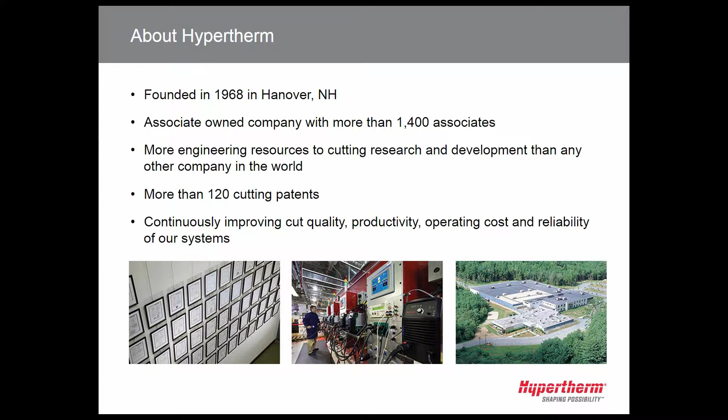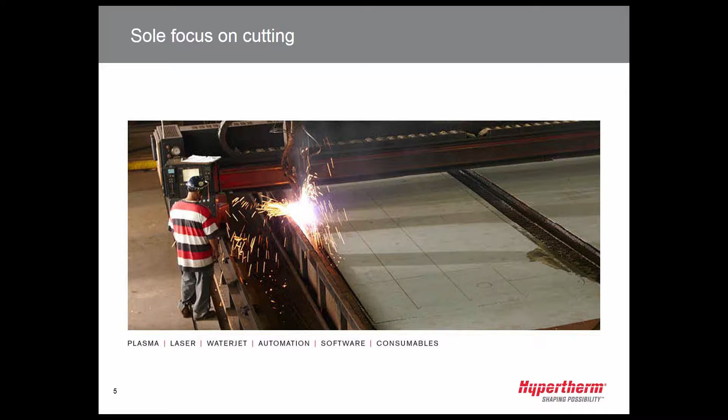Our products: we have plasma, laser, and water jet products, in addition to Hypertherm automation, so that would be CNCs and torch height controls, software, the subject of today's webinar, CAD/CAM nesting software, and also robotic software, and consumables for both Hypertherm and non-Hypertherm systems.

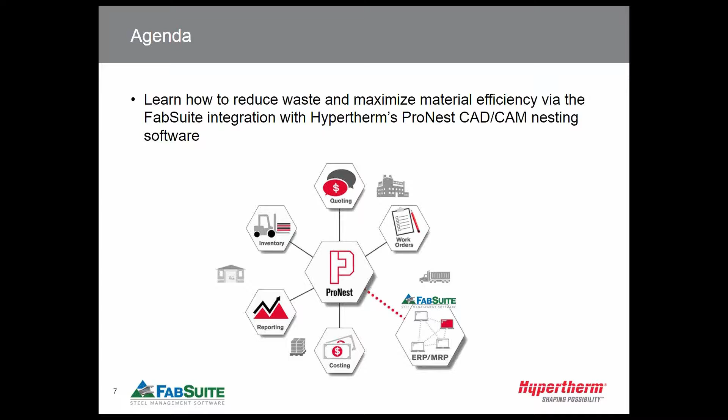ProNest is advanced CAD/CAM nesting software used by those who want to cut parts with laser, water jet, plasma, oxy-fuel, and combination punch process. It provides a CAD import through NC file output ready for cutting, where much of the process is managed automatically without manual intervention, as you'll see.

ProNest is designed with a modular architecture, with a main core module and optional modules that can be added to deliver the specific features that are right for the user's business scenario.

ProNest is recognized for boosting productivity, increased efficiency, enabling faster programming, ease of use, offering a single software solution for multi-process, all of which enable users to accomplish more. Lower costs through material savings and operating cost savings, and also improved part quality. Better finished part quality reduces the need for a secondary process.

What sets ProNest apart? It's the Hypertherm difference. ProNest is brought to you by Hypertherm industrial cutting experts with nearly 50 years of plasma, laser, and water jet experience to their name, and more than 120 technology-related patents. 100% employee-owned, Hypertherm's core values include honesty, integrity in the business, and excellence in technology innovation. As a result, across the globe, Hypertherm products are known for quality, consistency, and reliability.

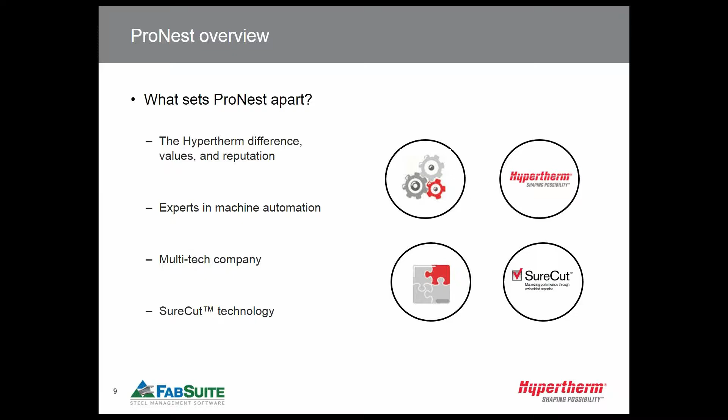So this is a brief overview of FabSuite.

It maximizes material efficiencies and reduces waste by efficiently managing our inventory and supplies. FabSuite ensures that you only purchase the material that you need when you need it, nesting to remnants, in particular optimizing bars and sheets that can help significantly reduce waste.

It improves productivity and reduces cost. FabSuite's production and purchasing tools can help reduce the time spent on high cost tasks such as material handling and cutting, because you are only cutting a bar or a sheet once and not multiple times.

Reducing errors and saving time. FabSuite imports data directly from authoring tools to eradicate manual data entry and the inherent risks of human error. This data is then used to drive the creation of quotes, purchase orders, invoicing, and shipping notes.

Full traceability. Another primary focus of FabSuite is material traceability. By recording key information such as heat lot numbers, mills, country of origin, and storing associated mill certificates, FabSuite delivers full material traceability for your product.

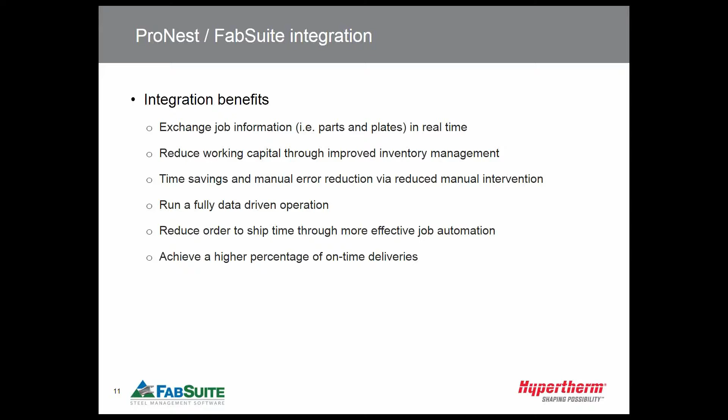Reduce order to ship time through more effective job automation. Saving time by entering job information can be translated into completing jobs more quickly, meaning that you can ship parts to the next process, to the customer, or to the job site faster, achieving better on-time deliveries.

How this integration operates: the bill of material data is exchanged from FabSuite to ProNest, containing the part, plate, and quantity details.

ProNest loads the BOM to its part and plate list, automatically assigning SureCut process parameters, including true hole, rapid part, and true bevel, lead-ins and lead-outs, then proceeds to automatically nest the job and output the CNC file for cutting and reports for operators and managers.

ProNest creates a report file containing the details of what was nested, plates consumed, and plate remnants, and returns it back to FabSuite for updating.

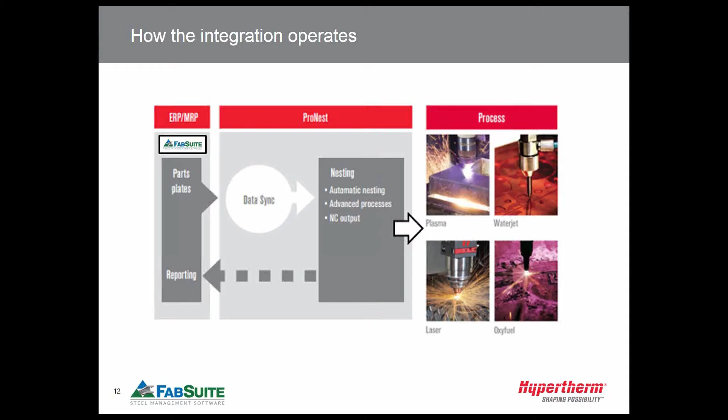All right, thanks, Steve.

All right, so Amy, you should be able to show your screen now. There you go. Okay, that's showing properly now? Yes, looks great. Okay, terrific.

So as you know, I'm Amy Davis. I'm the developer that wrote a good portion of this integration, and I'm just excited to show it off to you. So we're going to start by bringing a job into FabSuite.

We import a bill of material from just about any modern CAD package in existence. Most will export a KISS file, so we're going to bring in a KISS file.

FabSuite will automatically populate the job name and some of the fields. There's a lot of fields you can change on input. I'm going to just leave the defaults.

It asks a few questions as it comes in. This is an unrecognized material in this job.

It also has the opportunity to import drawings and CNC files. My CNC files for my plates are in DXF, so I'm going to bring in those DXF files that will give the CNC information for this job that I'm importing.

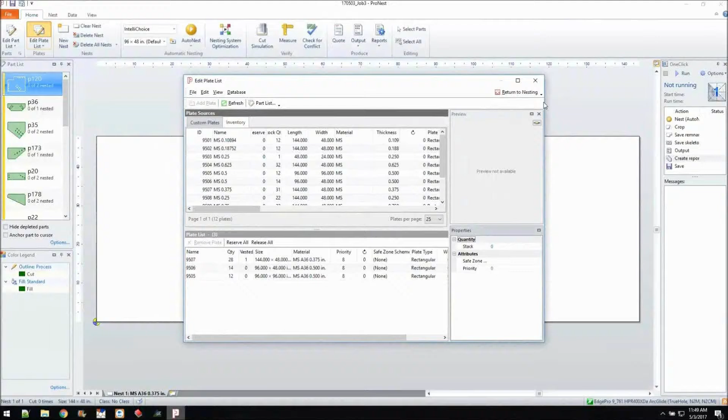So we'll highlight the plate, and I can go up to my 3/8 inch plate. I've got 3 of them reserved to a different job, so those aren't available, and I've got 28 that are available for this job. That matches. For the half-inch by 48, I've got 1, 2, 3, 4, 5, and 9 is 14, which is the half by 48, and 12 half by 96. So that does match what looks like should be available in FabSuite.

I'm going to nest just running one click. I think it looks cool, so we're going to watch it run with one click. Again, my plate list has these 3 sizes of plates that we just saw, and we can watch it nest.

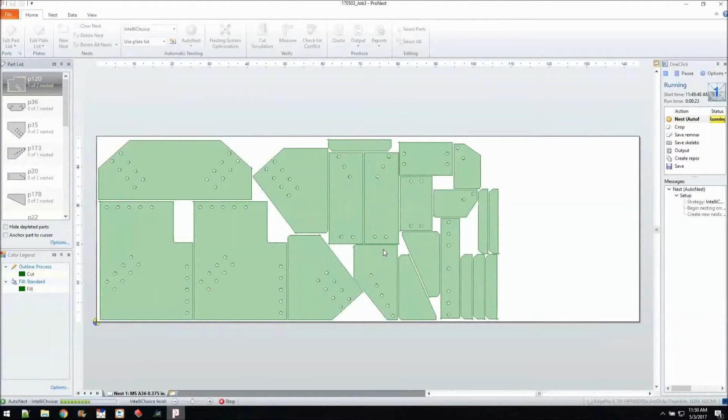One click is a way of running automatically through ProNest, where it automatically takes all the parts and part lists and does all of the processes you need to do beyond nesting, producing crops, saving out the remnants, producing reports.

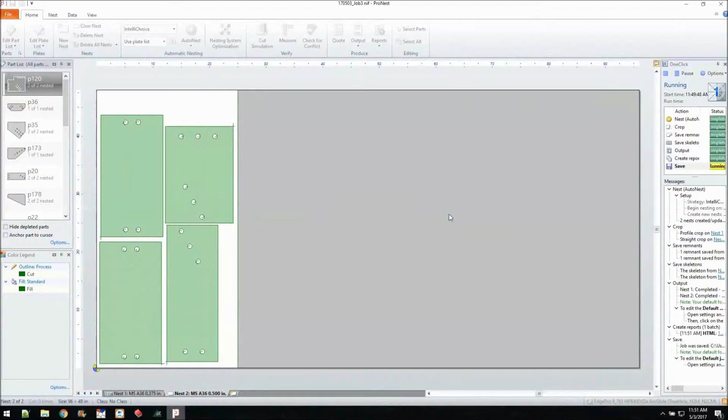Yep, and I have it. It just saved my remnants. I even had it save my skeletons. And it's sending that out to CNC now. Then FabSuite has a custom report that we create to come back to FabSuite. So we've got a rectangular remnant and a not rectangular remnant that were generated by these 2 nests.

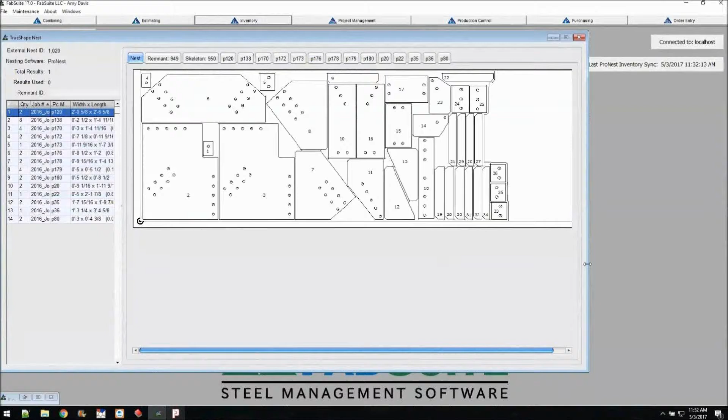We're going to bring them back to FabSuite. In that same combining run, we just import nested parts from HTML. This is the custom report. We can bring it in, you can see it combined onto 2 nests. And I can click View Nest and it will show me. This is the nest that ProNest created. And we've got the remnant from ProNest, the skeleton from ProNest, and each of the parts that are on this nest somewhere.

So you can see that remnant is the oddly shaped one that's on the 3/8 inch plate. The other one is a 1/2 inch plate, and we've got a remnant there, a skeleton, and just the 3 parts. So I'm going to save these to FabSuite inventory. And then we'll go look at them in inventory.

So here's our 2 plates. I can double click them and see the nest information again. So it's the same screen I showed you before. And for these also, they show on the bottom right-hand corner the details of each of the parts nested onto the plate there. So now that these are cut, they've been sent to the machine, I'm going to take them from stock in FabSuite.

Taking from stock marks them cut in the production control job. It also removes this plate from inventory and puts the 2 remnants, the remnant and the skeleton, back in inventory. So you can see 1 disappeared and 2 appeared there. If I double click it, it shows me the shape of it. That one's the skeleton there.

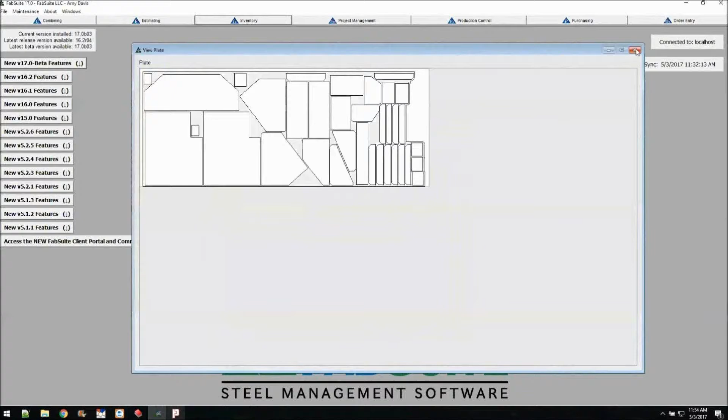And there's another field that I just added. It's not actually released yet, but I wanted to show it off to you. It's called remnant name, and it will show you in FabSuite the name that was given to the remnant when it was saved in ProNest.

So we'll reload that inventory here. And then we can see the RM9507N1 and SK9507N1. Those are the ProNest names for these 2 remnants.

So now we're going to nest onto this non-rectangular remnant. Oh, first I have to unreserve them because we want them to be available to be nested by a different job.

So we're going to go open a different job. This is one I imported earlier. It's a much bigger job. So there's my bill of material. If we look at just the plates and scroll through them quick, you can see there's quite a bit of plate work in this job.

So I'm going to nest some 3/8 inch plates, and I'm going to choose small ones so that we can make sure they're going to fit on that remnant. So we'll nest just like we did before. I'm going to change my filters a little bit to set my width and length to just 14 inches. And we'll do a 3/8 inch plate again, just the one size this time. ProNest is still my nesting software.

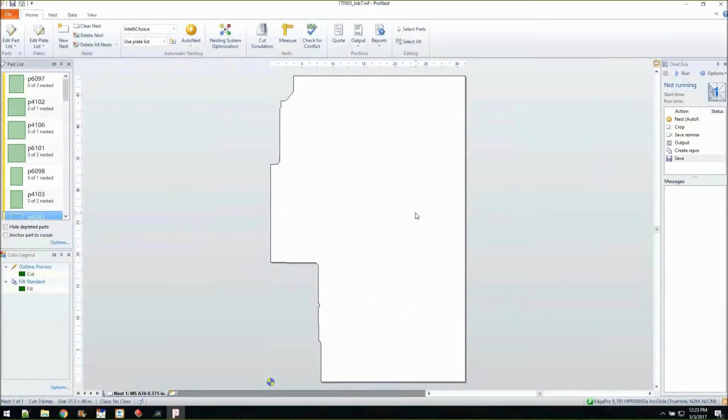Here's my parts, and you can see right away it's bringing up that remnant as the thing I'm going to nest onto first. We're going to go ahead and run one click again.

You'll see here's our plate list. My first plate is the big remnant. My second plate is the skeleton.

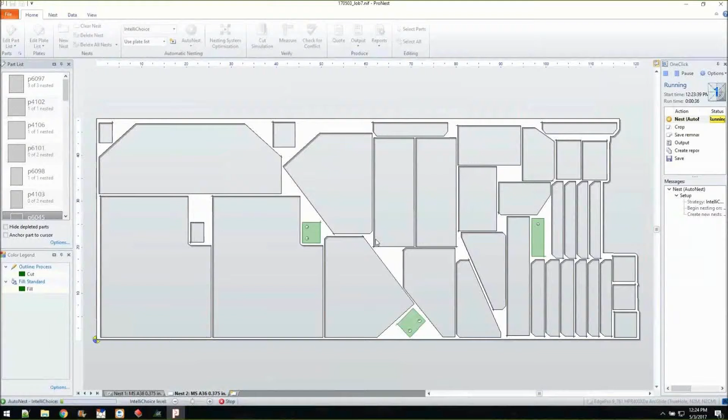So I think it's cool that it nests onto a skeleton. I know in your shop, you'll probably cut them up and not nest onto them.

So once again, it's running the nest. It's going to crop it for these.

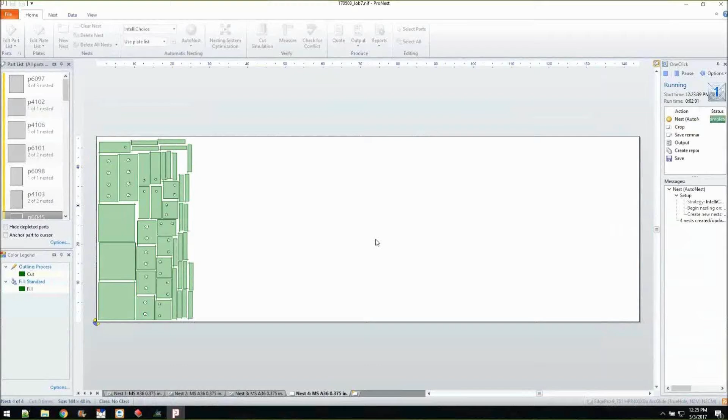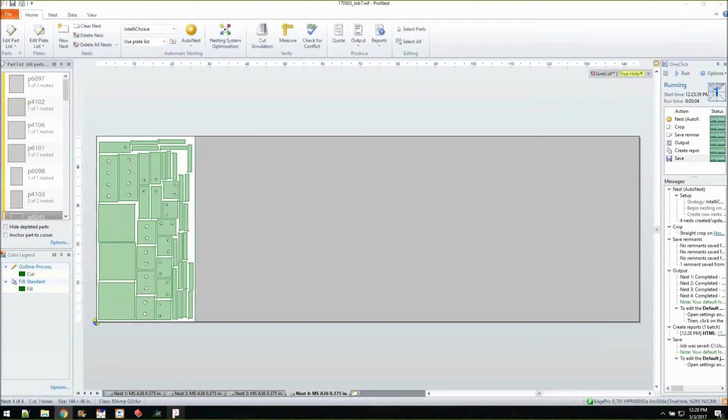So it's creating, now it's already sent to the machine, it's creating the report for FabSuite. And just like we did before, we're going to bring it back into FabSuite.

And here's our 4 nests. We'll just look at them real quick. It's exactly what we expect.

It's nested onto that remnant. This one's nested onto the skeleton. We've got the really full plate here. And finally, the plate that had a remnant left.

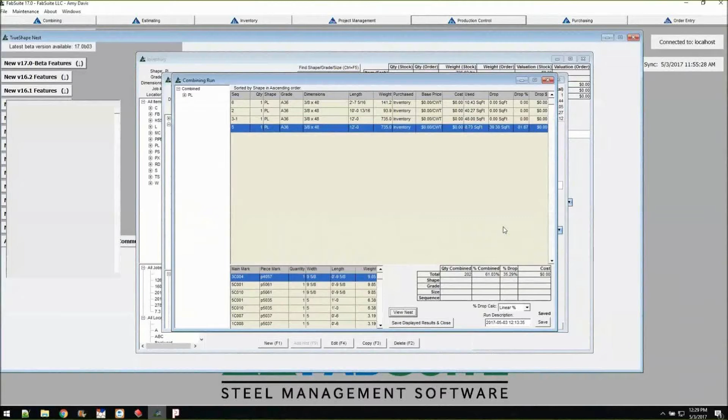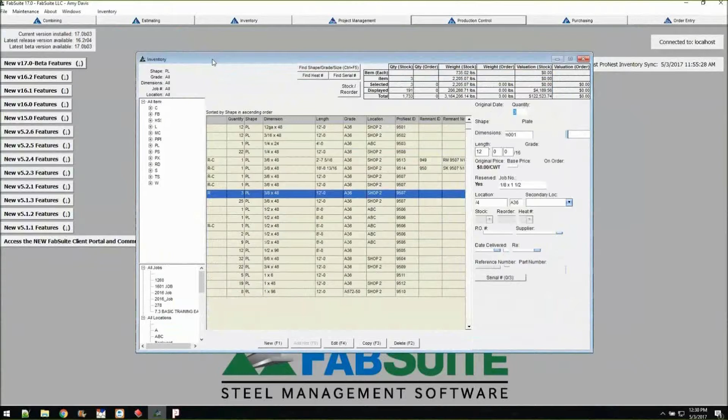So just like before, we can save it to inventory, and we'll see that inventory be used. The RC on the left shows us that these are reserved and combined. You can see that both the remnant and the skeleton have now been reserved and combined with parts on them. And we can, of course, double click and see that nest again.

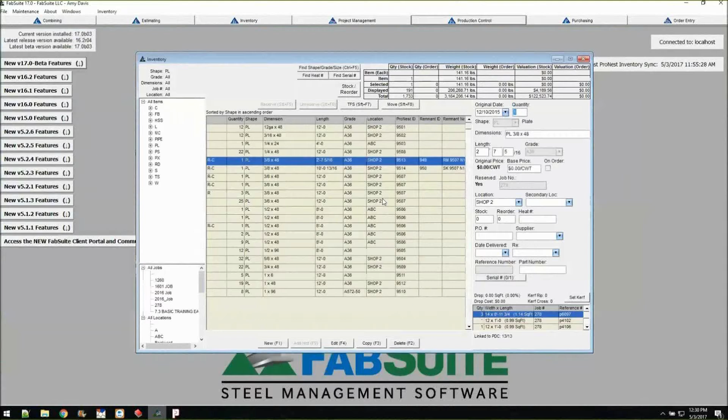So that's what I wanted to show you, the full life cycle of a nest going back and forth. I think I'm ready for questions now.

Okay, so Stephen, are there any more slides that you need to go through, or? Yeah, there's a couple. I'll switch back over to myself.

Okay, and so while we're doing that, Amy, there is one question for you. Someone wants to know if FabSuite will import IGES files.

I do not believe that FabSuite will take in an IGES file. It will take in a CIS2 file, and I believe those are easy to generate from IGES files.

Great. Okay, so Stanley, if you have a follow-up question, go ahead and type that in. All right, so Stephen, it's all yours.

So in summary, we just showed you a comprehensive integration between Hypertherm, ProNest, and FabSuite, which is available for all users of these products. Incremental integration costs may be applied depending on what products you own, such as if you have inventory or not.

When integrated, ProNest and FabSuite offer extended benefits of reduced working capital, reduced order to ship time, time savings, error reduction, higher percentage of on-time deliveries, and full data-driven applications. Integration implementation is fast, easy, and offers an excellent ROI.

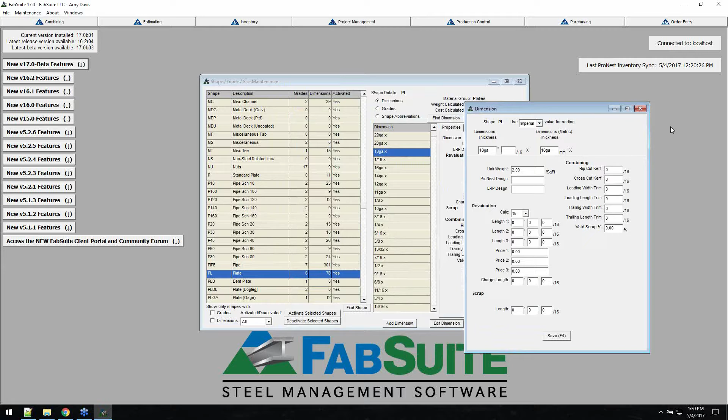There are some dimensions, and I don't know whether I have this set up. Gauge plate is famous for having a slight difference between ProNest and FabSuite in how thick we think it is. So we have a field here where you can denote what thickness ProNest calls this gauge plate if it doesn't match what FabSuite calls it. You can match both of those, and then we can export our entire nestable shapes to ProNest. We import that into the ProNest materials database, and then FabSuite and ProNest have the same materials and grades.

Does that answer the question? I think so. Keith, if your question wasn't answered and you want to send a follow-up, please do so. The next question is: where do you determine the material thickness and grade?

That is part of the properties brought in with the KSS file for a part. So we can see this is the first job I nested. Here's my plate—this plate is 1 inch thick, 18 inches wide, and 1 foot 6 inches long. So it's a property of the material, really—it's a property of the part in our bill of material, and it's a property of the inventory item as well.

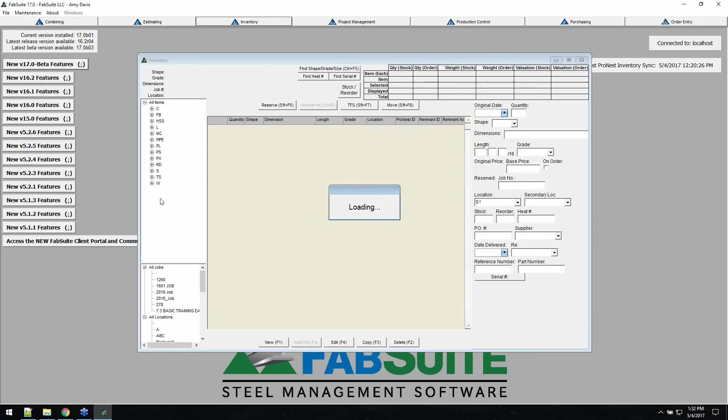If we look at the plates we have in inventory, each of these has a thickness first, then the width, and then the length.

There's a question here on the report that you get—that's a report set up in ProNest. It doesn't require DataSync. We can supply that; right now we're only supplying it for FabSuite. We have a link within FabSuite to download the report, and you put it into ProNest.

Okay, go ahead, Amy. Oh sorry, the next question says: will this work with all ProNest software, or is the new version required? The new version is not required. We've recently made quite a bit of updates to it, and I'd say there are advantages to getting the new version.

But the updates we've made, I believe, also work with the old version. I don't have 2015 or 2012 currently running—I don't have current licenses for those. So I know it works with 2017; I just showed it with 2017.

In the last couple releases of FabSuite, we've had a lot of ProNest improvements. So if you've been running into problems, as I see in the next question with Chasey, I'd say let's get you updated to the newest version of both ProNest and FabSuite and see if those problems get ironed out just by being up to date.

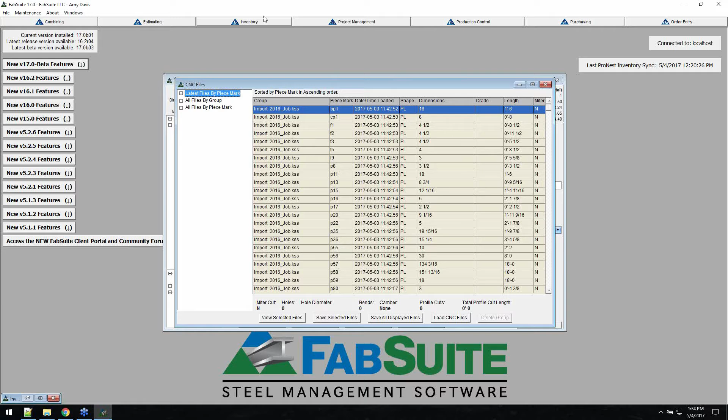Where do you track heat numbers? We track heat numbers in inventory. I haven't given any heat numbers to my inventory because I'm lazy, and because this isn't a real production job. When you receive inventory into FabSuite, you give it a heat number. This heat number is tracked, and when a part is cut out of inventory in FabSuite, that heat number is also associated with the part, so you have heat tracking for all of your parts.

Next question: where do you enter your new inventory, in FabSuite or in ProNest? You do it in FabSuite. There is an exception: if when you set up the integration you have a lot of inventory in ProNest, you can do an import from ProNest to FabSuite. But in general, FabSuite is the owner and manager of the inventory. When they're running together with the sync, FabSuite keeps ProNest's inventory, not the other way around. FabSuite will update ProNest inventory with everything that's been received, and ProNest's primary mechanism of getting remnants back is through that combining run import. Does that make sense?

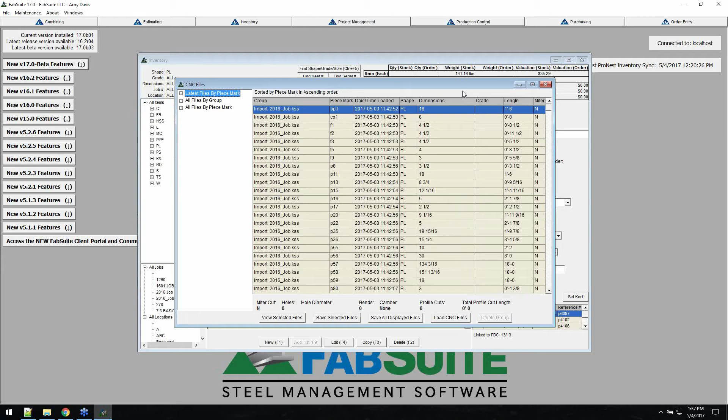A part in a job - let's see if I can get that job back open. Here we go. I'd say there are fields that can be used for things like description: category and subcategory, and there's a remarks field somewhere. Those are all mappable on import, so you can have anything imported. Oh, here's the remarks field, I'm just blind. We don't have a specific description field, but any of these three fields could be used the way you're describing, and I don't know of any character limitations on them. I guess I could try typing 50 A's and see what happens.